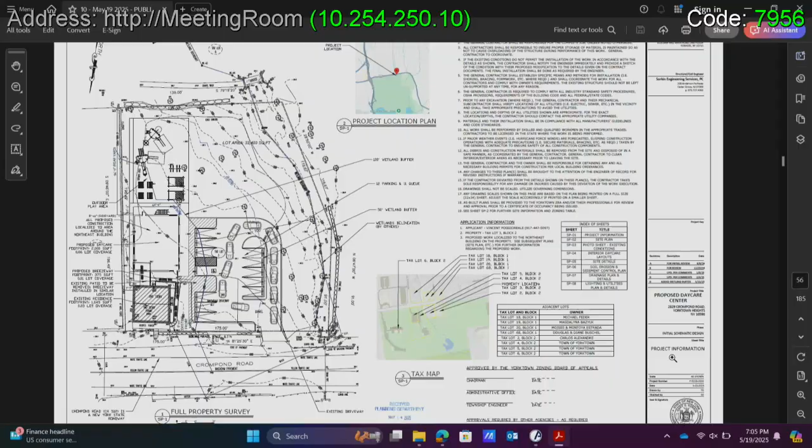The existing building predates zoning and is non-conforming. You probably recognize that it's been recently renovated. The applicant is seeking a special permit and some variances. The application is for the construction of a 2,000 square foot addition behind the existing building.

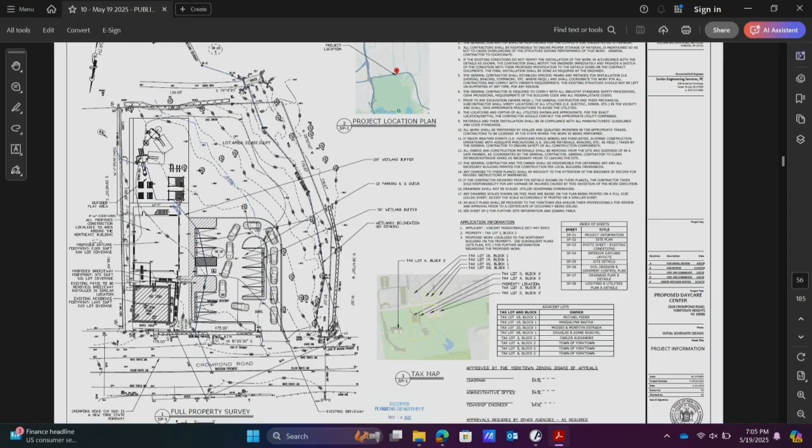The current site plan shows 12 parking spaces with queuing available for dropping off children, accommodating up to 11 cars. There's additional room for parking spaces, which I'll talk about in a bit if the board feels they're necessary. The proposed daycare center is actually the relocation of an existing facility in Yorktown that has been in business for more than 12 years and currently serves up to 50 families.

Children vary from full day to part day care. The schedule is maintained so that drop-off and pickup of children is staggered both in the morning and afternoon hours. Parents almost never park at the facility.

There's a drop-off location at the front of the building where a parent pulls up and a staff member meets the child and walks them inside. There are 12 full-time staff members plus the owner of the facility who work in shifts during the course of the day. The facility is open from 6:30 a.m. to 6 p.m., Monday to Friday.

I was last before this board in December, and additional information was submitted following that meeting regarding the existing wetland conditions on the site, mitigation for disturbance to the buffer, and consideration of traffic improvements.

We have met with the Conservation Board, and they've provided some comments. A wetland mitigation plan based on the current site plan was also provided.

In light of the new state regulations, we also met with DEC on the site to confirm that the existing watercourse does not meet the new definition of wetlands under the new regulations. DEC staff confirmed that it does not, but that there's a wetland just to the south on the town park property that is now regulated by the DEC. So that was flagged by the DEC.

It's been surveyed, and there are stakes on the property now showing the extent of the 100-foot regulated buffer from that wetland. That buffer area on the site is the proposed location of the playground, up in that kind of southeast corner.

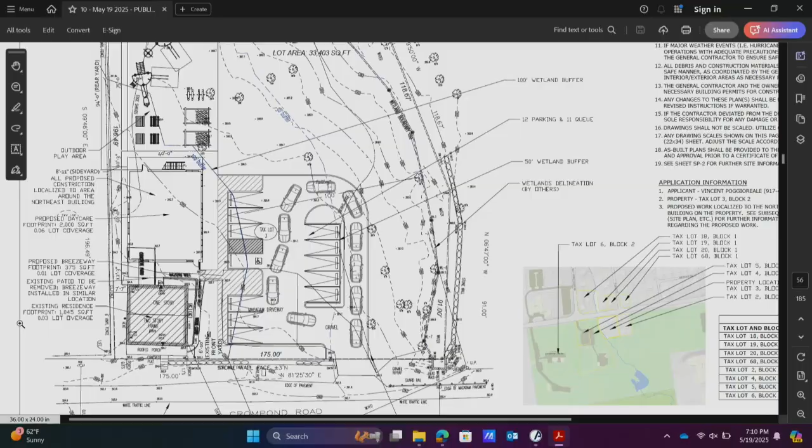The proposed building is an addition to the existing building of approximately 2,000 square feet. The number of parking spaces is based on the number of employees coming in and out during the course of the day, with a couple of spaces left over for parents who might want to come inside for some reason at some point during the day. But generally, as I mentioned, it's drop-off in front of the building, and a staff member escorts the children into the building.

And that pretty much wraps it up. Thank you. Anything from the board at this time? Yes, I have a couple of questions.

You said that the parking area is going to be entirely pervious? The parking spaces will be pervious, but the area where the cars queue up to come in and go back out to 202 will not be. That will be asphalt.

There is a design for stormwater management already completed, with infiltration on the property, and that will be modified and updated pending the final site plan. I didn't see a mitigation plan in the paperwork - maybe it was omitted, or did you put one in?

There was one submitted with the original application materials, that's still current. We'll go back and get that - we presented that to the Conservation Board as well, and they didn't have any objections to it.

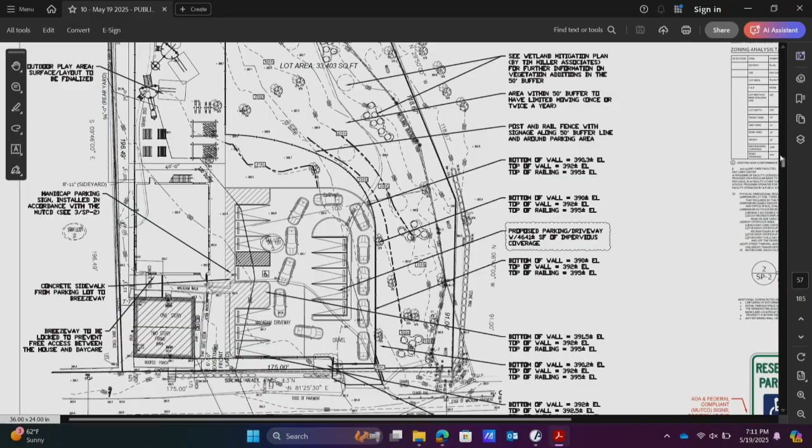Traffic-wise, one thing I should mention is our proposal at this time, pending the town's traffic report, is to have right-in and right-out only. We've recognized the potential difficulty of making a left turn onto 202 out of the parking lot, or making a left turn into the site on 202. Since there's a traffic light nearby, gaps would be created for making that left turn in, but our proposal is right-in, right-out.

You have another alternative with two driveways, am I right? That one shows one, and then there's another drawing that has an entrance and an exit. I'll be honest with the board, there's been a lot of discussion between the property owner and the engineer that I'm not privy to, so I haven't seen that plan.

I am concerned about the tightness. It looks like, from what's been submitted, there is a plan. I'm concerned about the first alternative, which seems like a very crowded single driveway - coming back out looks like it'd be a very tight turn to make that right turn. I kind of like the other one better, but let's hear what the public has to say.

We've put together some alternatives, but pending the town's traffic consultant and their suggestions, we haven't been able to finalize anything. There are some ideas available for discussion. We're waiting for the town's consultant - the town hired their own consultant, we didn't actually prepare a traffic study. It was determined at the December meeting that the town's consultant would prepare it.

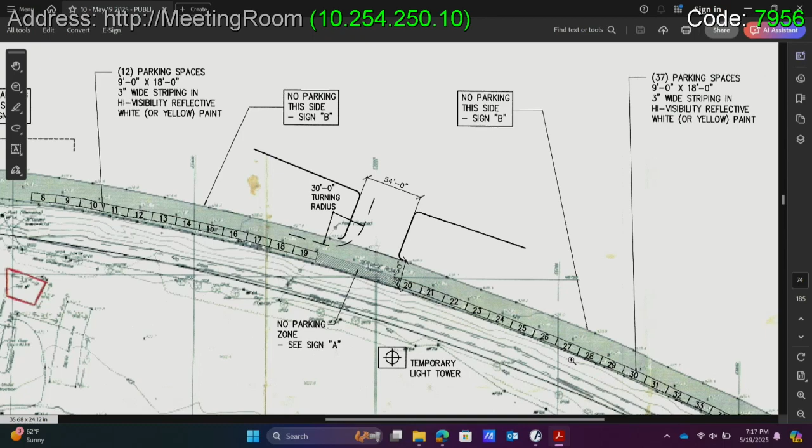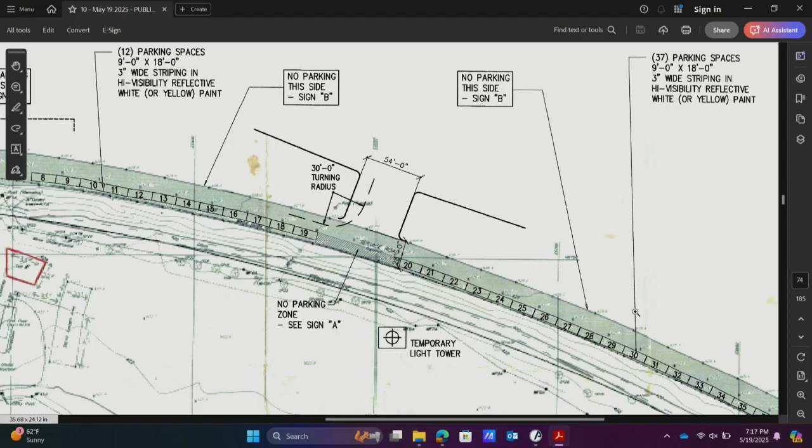So we've submitted an updated plan to show the turn-in from Route 6, including the turning radius, and also indicated location for some parking signs. We've also indicated at the turn-in that's a no parking zone. Indicated a detail about the parking striping, and also location and sign types for the parking signs, which were discussed to have no parking on that side closest to Route 6, and keeping all of the designated spots along the guardrail on the other side.

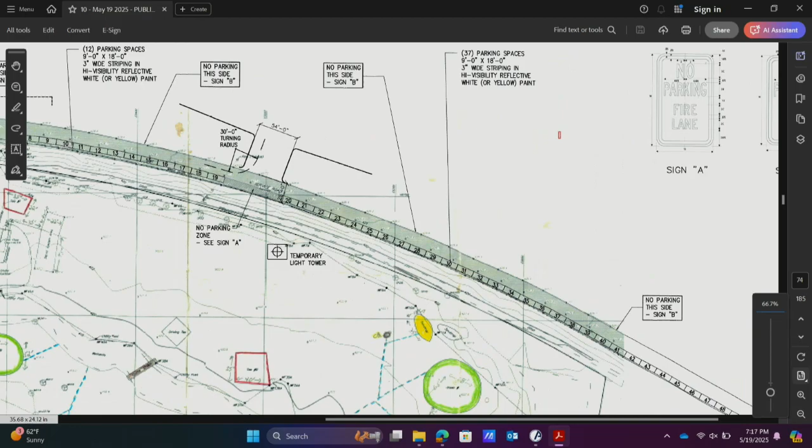I also indicated the location of the temporary light towers. Those are all portable light towers. I included a spec also. I think that was basically the bulk of the comments. I know there were other comments about the sewer connection, and Carmine's been working with the town engineers, and he can provide an update on that.

If you could—Joe's here, he's... oh, he's here, so I will let him talk. Joe Rena, how are you?

As I had explained the last time, to run the sewer line out to the county sewer, we need to get permits from the DEC because we're going under the Shrub Oak Brook. Last week we met with two of the field people from DEC, and they indicated that we may not need a permit from them. They weren't 100% sure, but they believe that once we clear a certain elevation below the brook, no permit is required, so we're waiting to hear back from them on that.

That's where we stand. That's good news. Yeah, real good news. All right.

Anything else from the board at this time? Couple of questions. You were last here, I think, in March? Yes, Mark. Okay, at that point we wanted some information on your hours of operation. Yep, that was submitted also. Well, it was submitted, but I don't think it answers at least my question, because you say we're going to operate several evenings, and that's as much detail as you gave us. So what are your specific proposed hours of operation at night?

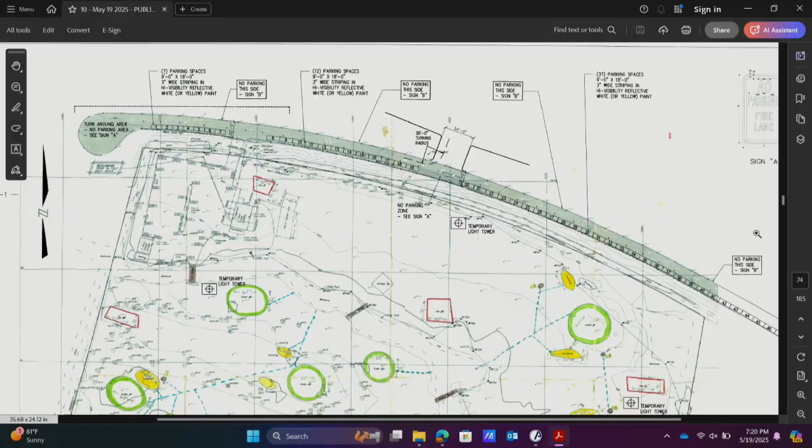The other question, I think we had, I'm not sure it was answered if I missed it—do your drawings show the location of the existing subsurface treatment? This drawing does not, no, it's been filed and approved I think. Because that was an issue we had also, the septic locations—we asked for that in March also.

But those are my main concerns, the hours and the nighttime lighting effect. Because I think 11 o'clock at night to light that up is late.

I have a question about parking. You're showing it on one side of the access road? Yeah, but usually when you go there, it's on both. People are parking up - of course there's no sign there, that's why we're talking about a no parking sign. Other than just putting up a sign with a yellow stripe, I mean no parking.

That's all you could do. Clearly indicated, right? Should be clear. Well, not only clear, there's gotta be a consequence. I'm just saying, I've been there and it just can't be police it. I've never been there so I'm not gonna say police it. Hasn't it been filled up on both sides? I mean, it's gotta be policed, I guess.

John, is this road still under the jurisdiction of the DOT? I'm not sure of that. I'm not sure if it is or not. Does that prevent us, or the police department, from enforcing if there's no parking designation?

Well, this no parking, I think if our police are to enforce it, it needs to be voted by the board - you'd have to do a no parking resolution for that side of the town road. Yeah, get a no parking area approved by your board. If they have jurisdiction, they can do that.

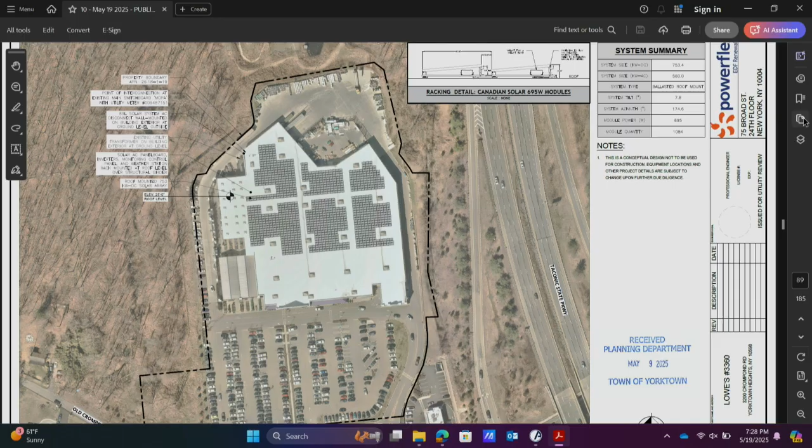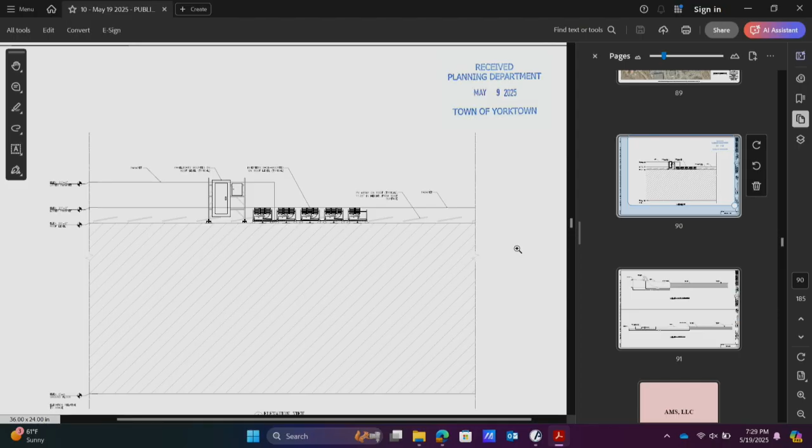We provided elevation drawings that should showcase the street view from the perimeter of the property itself. As you can probably tell, the parapet wall from the Lowe's building covers a height of minimum 3 feet. The solar array itself is about less than a foot, so visibility is very limited there. Everything is going to be mounted, as you see there, with mechanical attachments.

Just want to hit pause for one second. And I think when the project was done, clearly you can't see anything from the ground. I think one of the issues we had moving forward was the Taconic State Parkway, and they have a view shed that they're very protective of. I know that was when we went first from the Costco to the Lowe's, was one of the struggles we had as a board, trying to preserve that view shed.

So I drive past this every day. You have a very pristine roof surface, and now we're gonna have solar on it. It's gonna be roof mounted... it's not gonna be at an angle, it's gonna be flat. The rooftop itself, solar.

The solar itself will be tilted about 7 degrees off the roof surface, so there will be a tilt to it. So you will see that from the Taconic State Parkway view shed.

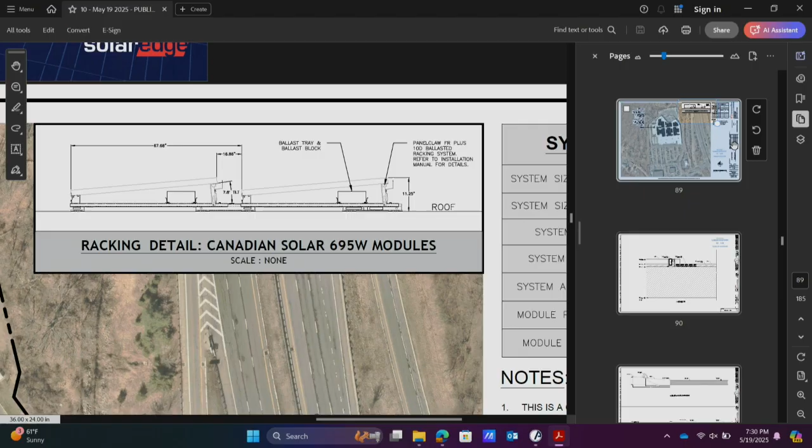Is that something we have to be concerned about? Well, why don't we see how much of the roof shows now. If you're looking at the roof from the Taconic driving 40, 50 miles an hour, you're gonna hit a tree if you're looking at a roof. Well, I would agree with you. They have their own regulations.

You just can't penalize the applicant. I'm not saying we're penalizing them, I said we're trying to cross the Ts and dot the Is, because I know we were held to task on that. Does that even come under our jurisdiction? It does, as our approval.

The special permit language also talks about when it's on the roof - if it's not visible, then there's no issue. This may be visible here, and I think this sight line diagram indicates that it will.

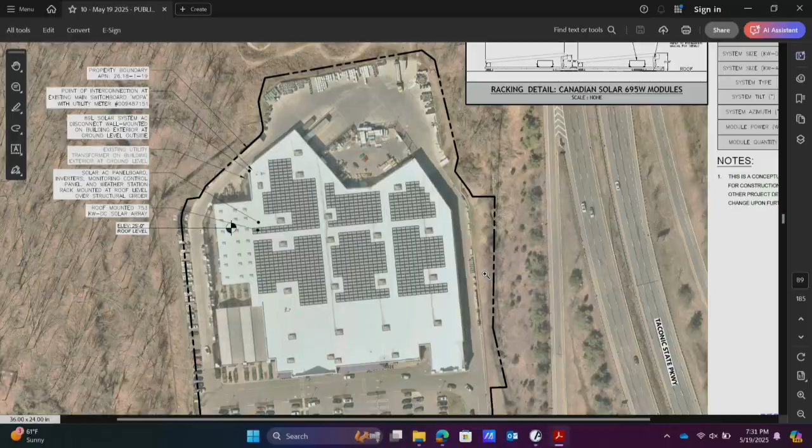I'm not sure where that figure, the 6-foot figure, is representative to be standing. Is it on the parkway? Yeah, for one diagram. For one of the elevation drawings, it would be assumed on the parkway.

We should know, and I'm sorry if it's already in the package, but we should know where that site section is cut from, so we know exactly where the person is standing, so we can make a proper evaluation. I think it'd probably be a good idea to have some photos, if they could take them, so you get a better sense of what you're looking at from your vehicle.

Although going 50 or more, nevertheless you are right, you can see the roofs. I've seen it many times.

As one member of the board, clearly when we have a solar application, this is the kind you want to see, where you have it on the roof. Again, I just know we have to do our homework on it, because I remember it was very, very long hearings in the beginning with the first application, and we had to float balloons from the park.

So just, John, if we could look into that personally - as one member, I think if we're gonna see solar, that's the place you want it. We just have to make sure we do our homework on that view shed from the county.

Would renders help with viewing that from that angle? I think a profile or something would help, yes. I'd work closely with John and Robin to see how you'd work that out.

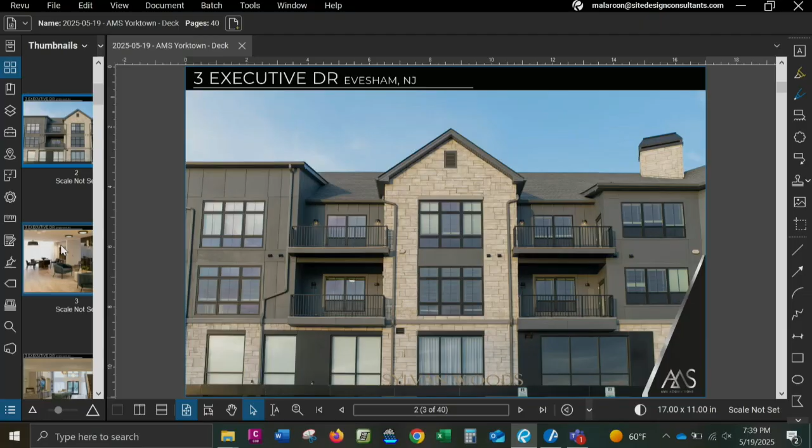So this is down in Evesham, New Jersey, 124 apartments, very similar spread of 60% two bedrooms, 40% one bedrooms. The apartment community is meant to be a place where residents come together and, through facilitation of staff, form their own internal communities and have activities suited to an active adult lifestyle, whether it be a gardening club, a card club, any host of amenities that can be utilized on an outdoor patio or pool area, an interior sports lounge, all of the above. Next slide.

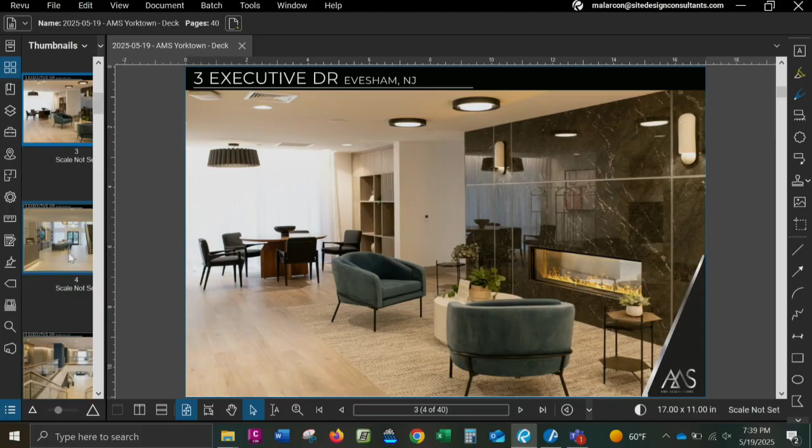So one thing we like to do as a brand for Sylvan Woods is focus on utilizing natural materials on the inside and out, just to get a sense of calm wellness when you walk in the building, and also have some luxurious touches added throughout. We work with our architecture team to really amplify that design experience within the building. This is within the lobby adjacent to our mailroom of this project.

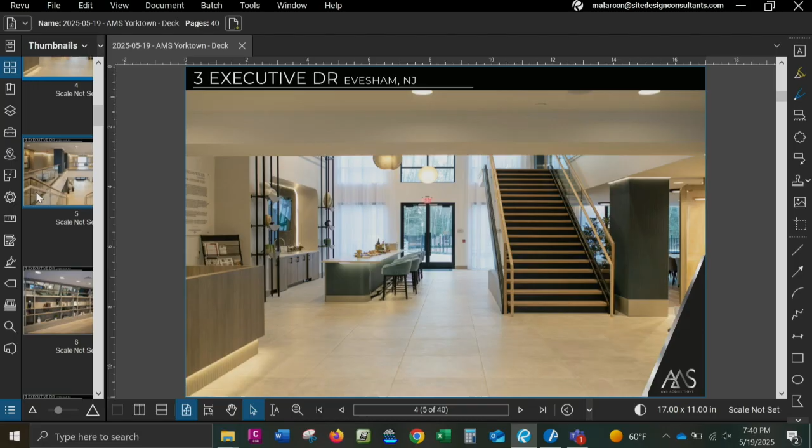So this is the lobby when you walk in. You have a concierge desk on your left. You walk forward, you have a great room with a double height space and a bar area that's connected to a catering kitchen, so you can have events for residents throughout the year for different activities.

You go up the stairs. To the left, you'll see a community library looking downstairs into the great room, and beyond that you have a reading room and a movie room in the back right corner. This is the view of the library.

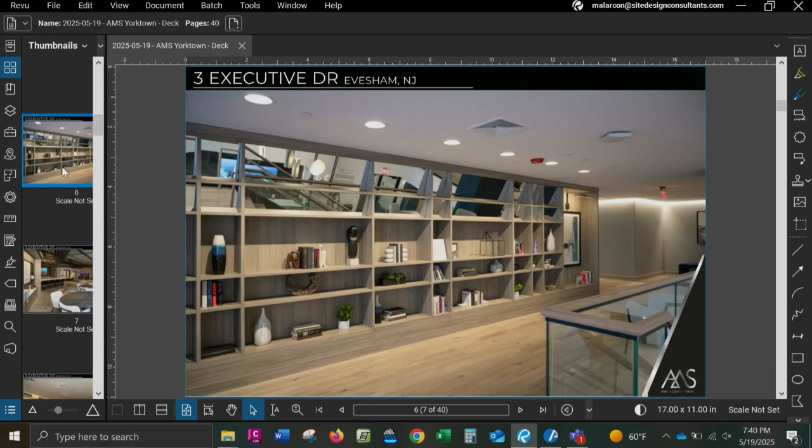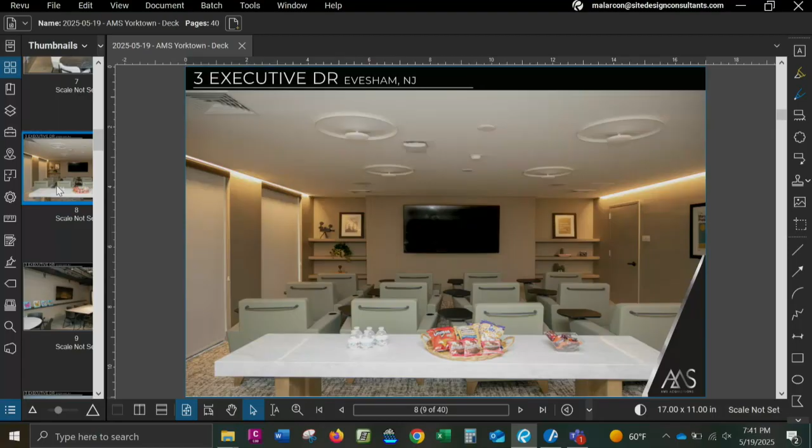This is just a movie room we have as well. And then we often like to put in a maker space or art studio within the building. All these amenities we'll have within our project in Yorktown, and probably a bit more because the project size is a little bit larger than in Evesham.

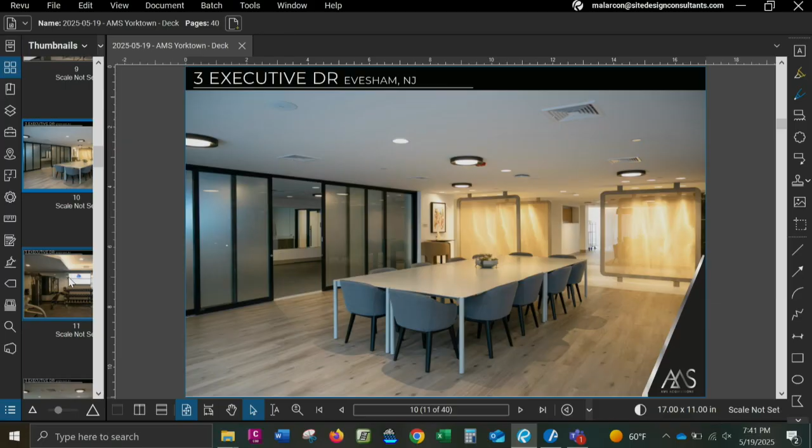This is just a dining area that we have. What we'd like to do is create flexible spaces. You see on the left of this image, there are doors that open up, and you can expand the event space and dining area into another room, so you can have larger events for the community to gather in one night.

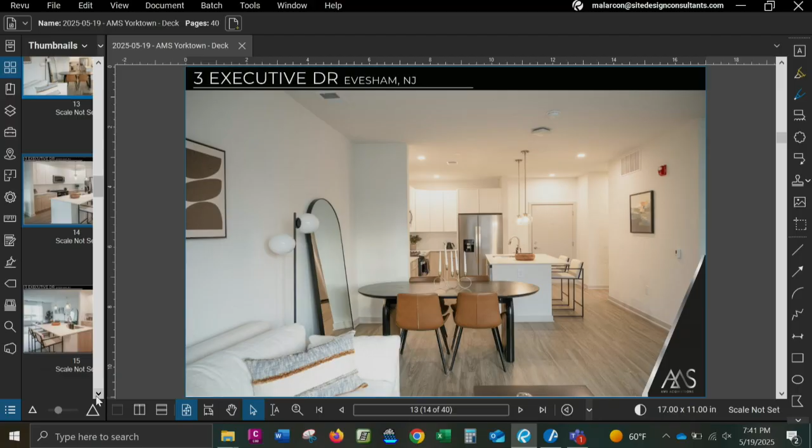And then just a view of the apartments. Again, light and bright. We like to have oversized windows, luxury finishes, designer kitchens, often with islands, flexible seating, a true kind of downsizer experience.

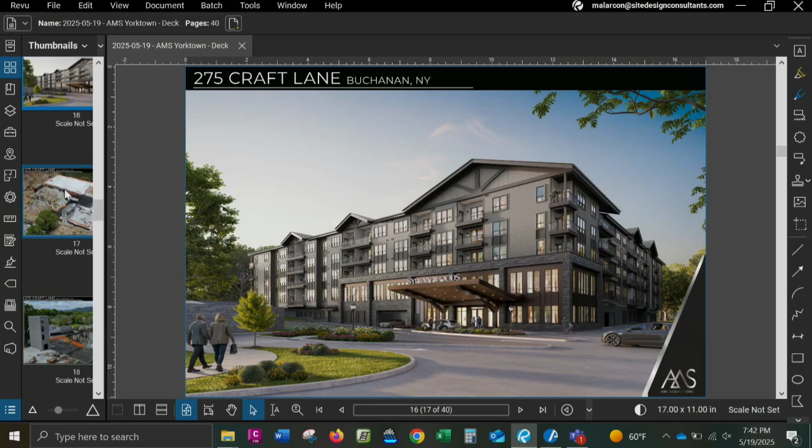So I'll go to our next project coming online. This is actually in Buchanan, under construction right now. This is 148 units, the same product, Sylvan Woods. This is fresh off the press, so you're probably one of the first people to see this, but we are slated to open next year around this time, and we have a couple of construction images here to show you.

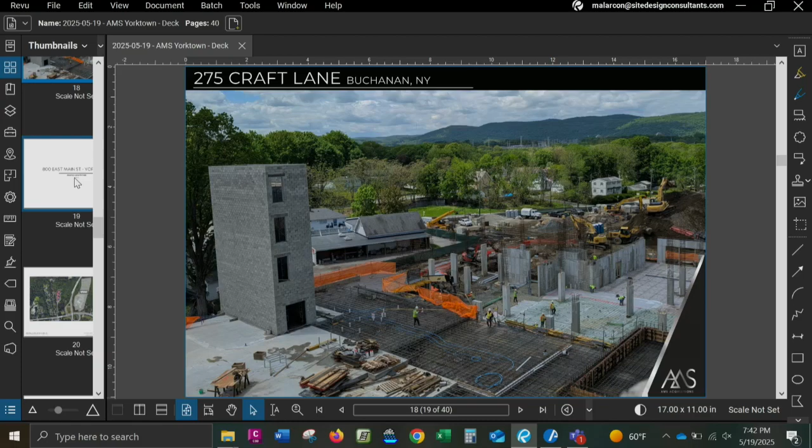So one thing I'll mention is at AMS we build all of our low-rise projects, so you have development and construction working together through the life cycle of the project. So it's going very smoothly there. I'm sure you can talk to the village about how things are going. I'll turn it over to Sealand Architect.

Thanks, Joe. Can you switch to the next one? Hi everyone, good evening. My name is Sealand Putham, I'm a principal at Beinfield Architecture. It's a pre-app, so I'll be concise, but please stop me if you have any questions.

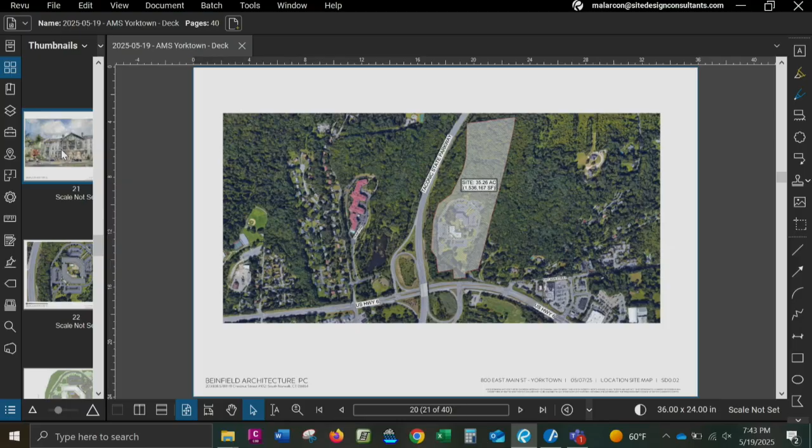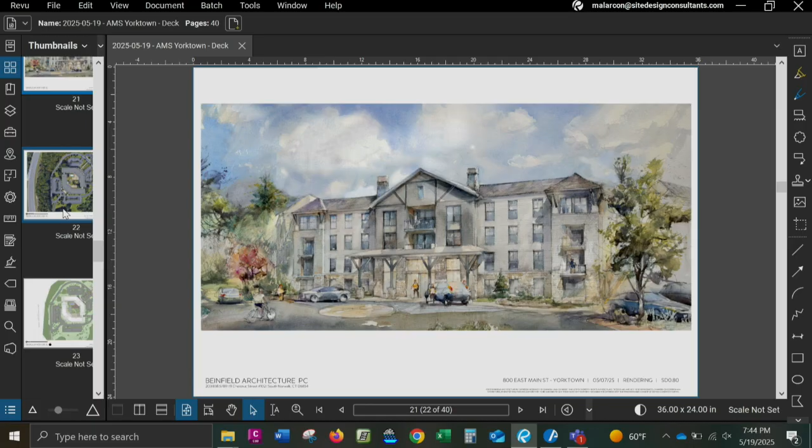And once you get through, you'd look over the valley. So hopefully a dramatic entry into the building, and we'll repeat that at the bottom also. This is early days, but it's the direction we're going in. Materials will be clapboard siding, vertical siding, stone base, asphalt shingles on the roof to look like actual shingles.

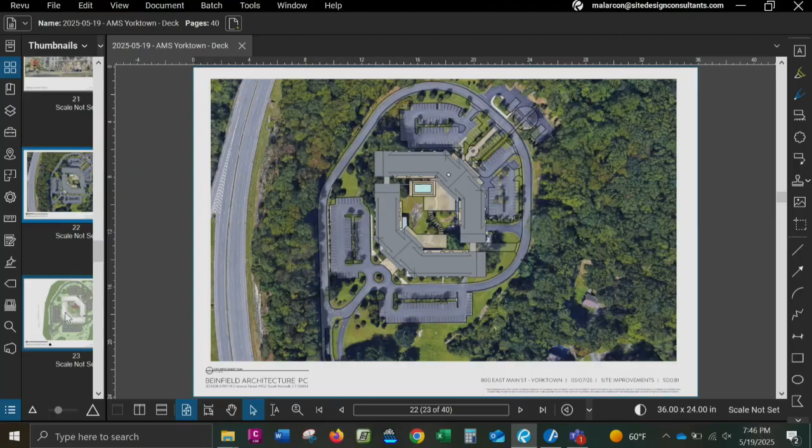You come up, looking up at the south building, and you're dead-on axis with its entrance. Then you loop around to the north building, and you're dead-on axis with the north building entrance. If you have those two entrances, you come through and look into the shared courtyard, looking up and down through these two hopefully dramatic amenity spaces and a dramatic courtyard, which Jason will explain.

So this is the landscape. We'll get into that, but Jason, our landscape architect, will go through that.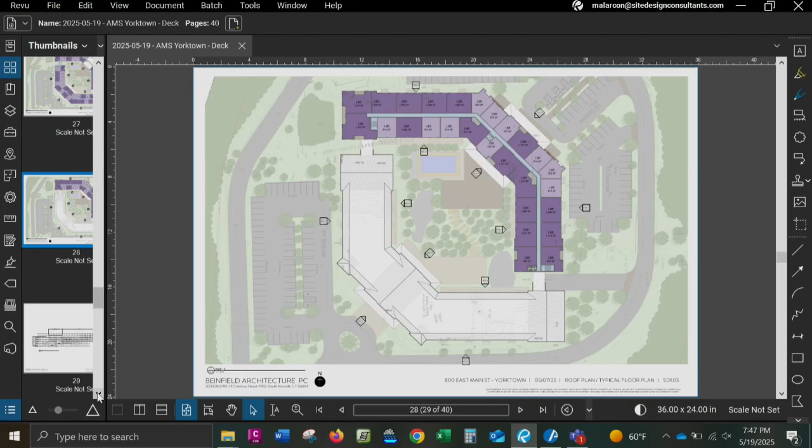And that's the upper level now that rises above the southern building. The section is probably the most telling if you can read it. Here you can see the upper entrance on the north side, looking through that amenity over the courtyard. If you arrive from the south side, looking up through the amenity, up at the courtyard, a common courtyard that we're grading and taking advantage of what's there already.

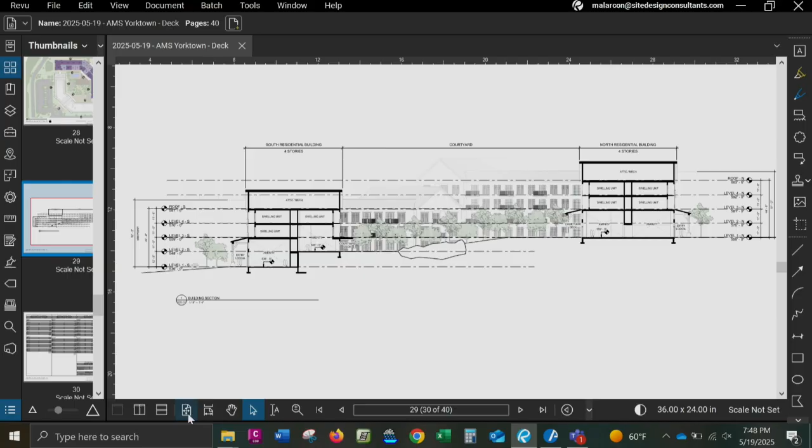What that shows is it looks like there are two high roof elements, but really that's taken to the highest point, that gable end you saw in the rendering I first showed you. We intentionally took the section through that so you can see that the height meets the 55 feet, that when you measure the midpoint of that building, it's still 55 feet. You can see the building is coplanar for two stories, and our intent is to link them with bridges on the ends.

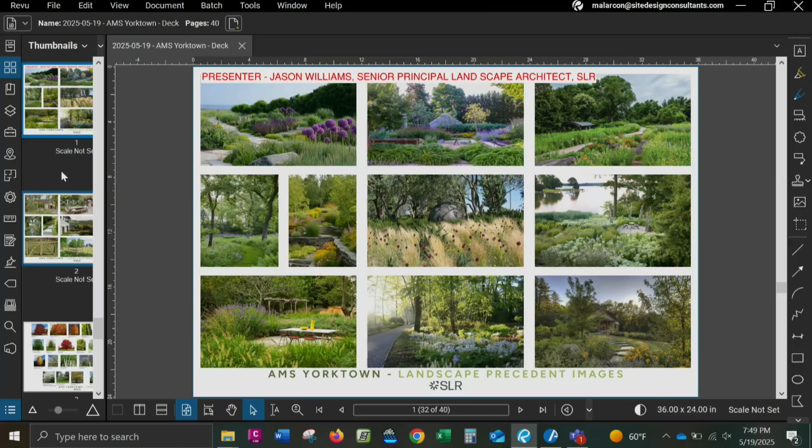This naturalized soft landscape is combined with elements of stone and wood, very simple geometries, intimate gathering spaces, a diversity of different soft paving materials, a lot of pervious materials. We're creating pedestrian view sheds throughout the entire area, which currently doesn't exist. Even our site lighting uses wood poles with luminaires that have a very agrarian design style.

As I mentioned, according to DEC, the surrounding woodland is an Appalachian oak hickory forest. What we're looking to do is essentially bring that woodland elements down into the site close to the building. Things like red oak, white oak, black oak, pignut and shagbark hickory, red maples, hop hornbeams, and witch hazels are all part of our landscape plan.

Along with understory trees like service berries and dogwoods. The shrub layer, low bush blueberries, make up for example our parking lot islands, very different than what you typically see in islands, along with aspen trees. A lot of natives and diversity.

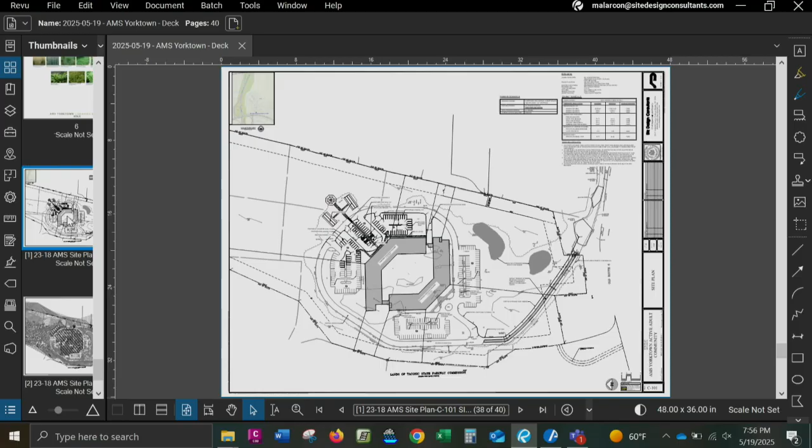That currently goes to a pump station, which is east of the cul-de-sac. It's a town pump station. It services this site currently and some of the homes along Old East Main Street. So as part of this project, the project sponsor is going to install a new pump station, new wet well, new pumps, new controls, and a new generator to accommodate the flows from this site and those additional adjacent homes. As far as other utilities go, there's underground electric that runs up to the site that has adequate capacity for this project.

And again, we're totally staying within what's already been developed. Thank you.

That'll be the end of it. We don't want to filibuster you. We know this is just the start. We'll answer whatever questions you have. But suffice it to say, you have around a 50-page finding statement. There are significant traffic improvements, a couple of traffic lights, widenings, queuing areas, et cetera. I'm sure you may need to go into that. We've been through that with the town board. Those things all exist. The storm, we're touching on it, but if you become familiar, we're happy to answer whatever questions you have with those particular items, each of them being addressed through an environmental review process. And there are significant conditions and mitigation measures already imposed on this project as part of that two-and-a-half-year project before we get to you. So that's the end of our presentation.

Any questions? I have to say, as one member of this board, volunteering probably over 20 years now, this is one of the nicest looking presentations. I didn't want to say it, but it's really very well put together, very well thought out. The landscaping, everything just looks so professionally done. What a very nice application. I think we'll enjoy digging into the details.

I know, as one member of the board, the one concern I had when this first came to us was the traffic. Again, we'll dig into those details. But really, just what a very well thought out and well put together presentation.

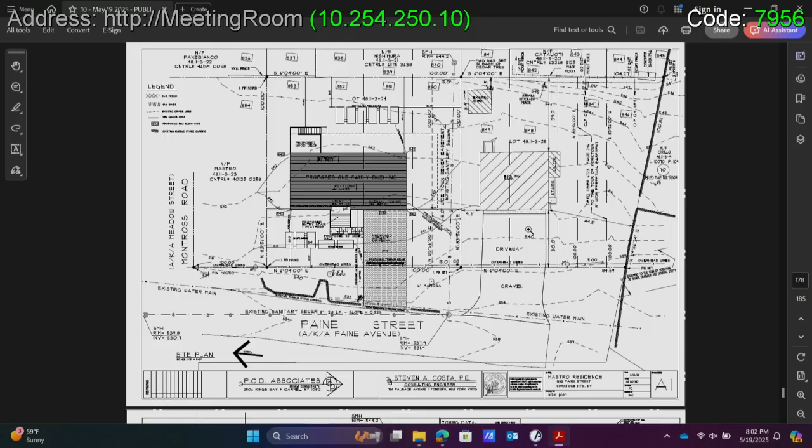It's a family-owned area. They actually own 3 spots there at the property: the lot on the corner and the one right next to it. So this is a lot in the middle of common ownership. Well, they're owned separately by different members of the family. What about the garage, is that part of your application? No, that's a separate lot. Only the lot in between has the level garage and the corner lot.

So here's the corner, here's the proposal, here's the garage. So what does the garage serve at present, or in the recent past? Just automobile storage, for the owner of the corner lot. I see, okay. So these 3 properties have been basically serving a main residence and this barn, and the many open space in between, right? For many, many years. Yes, understood.

That garage looks like it's ready to fall down. Yeah, we had a proposal a few years back to renovate the garage, but they didn't go ahead with that for one reason or the other. But that's probably a plan for the future.

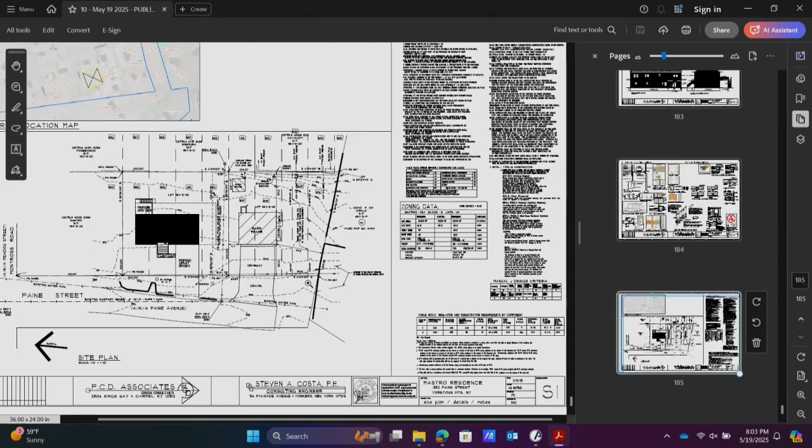Can you talk about the size of all of these 3 lots? So they're all about 10,000 square feet. The one in the middle is 10,000. The one in the corner, I believe, is the same, and the one on the end is a little bit under 10,000. Is there any of these 2 or 3 in common ownership of one entity? No. So there's 3 lots, 3 separate owners? Yeah, I believe the father and then the 2 sons.

So how do you get 20,000 square foot? The building requirement is 20,000 square foot, but the lot's 10,000 square feet. Oh, okay, so are you applying for a variance? We haven't been told that yet, the building department didn't write us a denial letter for that area yet, so I can't answer that right now.

If you look at the area, there are no lots there anywhere near 20,000 square feet. Right, but the requirement for many decades has been 20,000 square feet.

The garage at the end appears to cover almost the entirety of that lot. Which one is that, 44? In terms of the setbacks, I noticed that the house across the street has expanded its driveway to enable parking of, I would say, a good 6 cars. The house across the street? Yeah. We have nothing to do with that house across the street. No? We'll check. And the garage is 44 feet on the right-hand side and 39 feet in the back, 30 feet in the front.